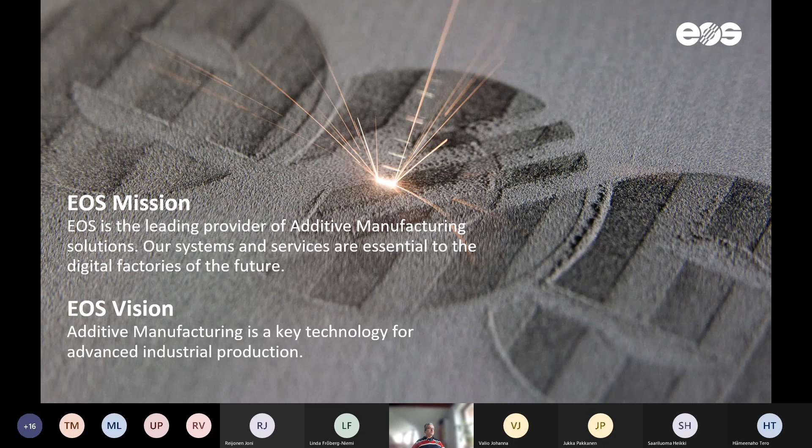So that's a little bit the figures. One way of describing the importance of a company is to talk about installed base, and that's only one number. It's not a very good number, but it is a number. Throughout its history, EOS has installed close to 4,000 systems around the globe, out of which a little more than half are metal systems and a little less are polymer systems. This shows the trend globally as well, because polymer systems were introduced first, and for most of the history they were always dominating, but then, with the introduction of industrial or high-level materials which could be used in demanding applications, this made a turn in the distribution of systems.

So nowadays metals are dominating the action a little bit.

Sales numbers, we experienced a relatively tough situation a year ago, with an impact coming from slight stagnation in the additive manufacturing industry, plus of course the pandemic which hit us. We lost a lot, basically a third of the sales last year. So, of course, this means the company has been under restructuring, and to some extent still is, but now it looks already much better, and the signs are promising, so we will survive.

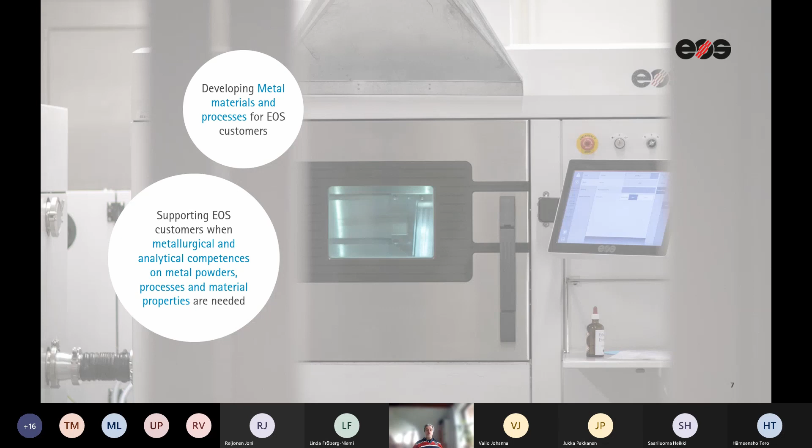So the history, why do we exist? Why does a Bavarian family-owned company have a subsidiary in Turku, Finland? There are historical reasons for that: we started jointly with EOS to develop the metal application for additive manufacturing, which was at that time called rapid prototyping. All the metal materials know-how that EOS has basically comes from this organization.

In the 90s, we kept on developing the technology jointly, but then in 2000, because the original owner, which was Swedish Electrolux, decided that this was definitely not their core business, they decided to sell the factory where the development was happening. Before the sale, EOS wanted to arrange different conditions for the developers, and they founded a company in Finland where all the developers moved to. That's when we became part of EOS.

So we have worked the whole history around the technology, first as a joint project or collaboration partner, and then from 2000 on as part of the EOS organization. We are now about 65 people, a little less than half within the R&D organization, which was the original function. But now we also have sourcing and many other parts, like it has all the parts of a normal company, except sales—we utilize the corporation's sales channels.

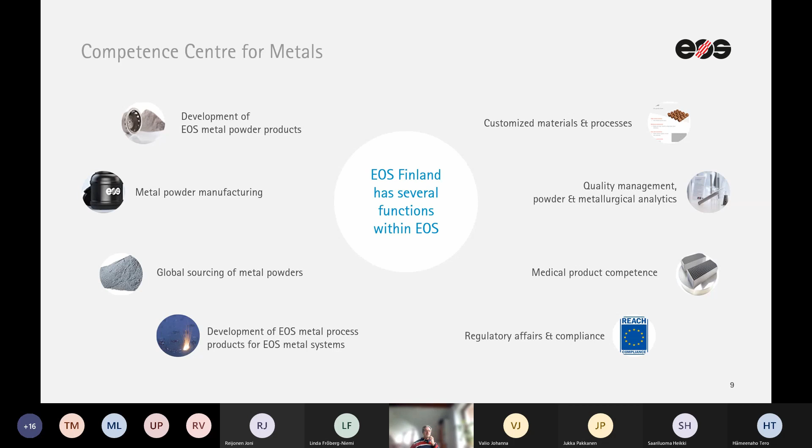We have a lot of machines, obviously, for internal use. We have big machines, medium-sized machines, and small machines, and they're all used for different purposes, but mostly to develop new processes and new powder materials, and also for quality control of our powder products, because we make sure that our original promise of part performance happens throughout the history of each powder product.

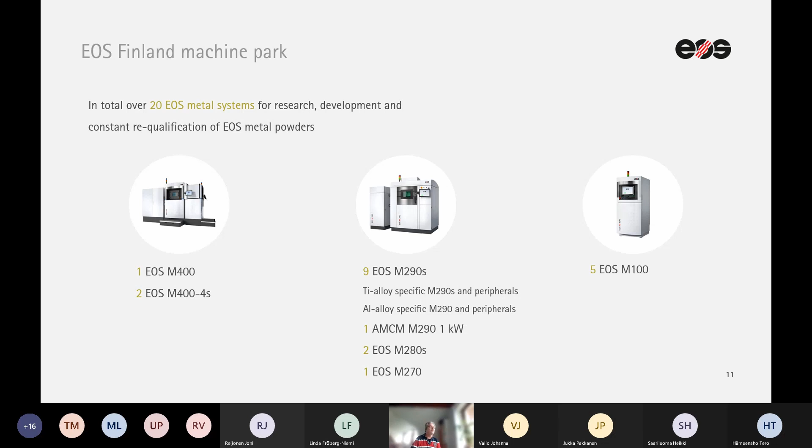AM of metals is not only the printer and powder put in, it is very much nowadays about monitoring of the process, what happens there, and in the future this will probably lead into closed loop control of the machines. But we want to create data which confirms to the customers that everything in my job was okay, that they can rely on my parts, and they don't necessarily have to produce test parts for destructive testing per each job. They can also rely on digital data to make sure that the other parts are okay.

AM of metal is very much about heat treatments, as metals usually is. So we are equipped with a very good setup also in heat treatment facilities. The reason we had to also have know-how in this is that AM is a new way of synthesizing materials, and conventional methods around the globe are based on completely different principles. This automatically leads to the fact that the heat treatments which are built into the metal properties have to also be adapted for the AM world. So we have to develop new furnace processes, new heat treatments for even conventional alloys when they are brought into the AM world.

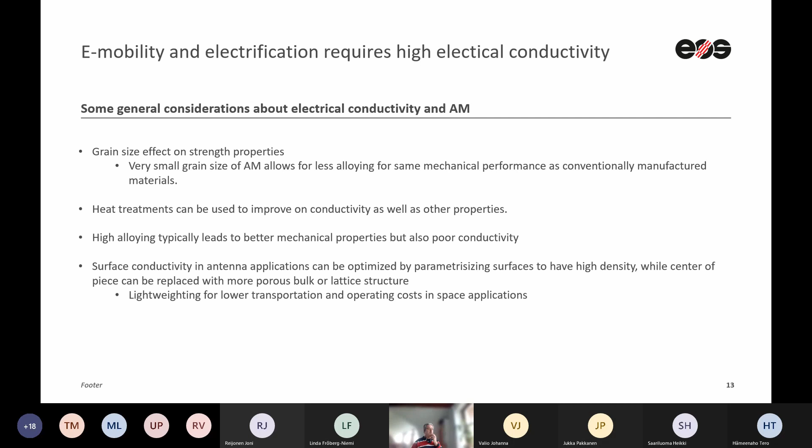Also space applications, of course, where weight is poison, this can help optimize parts for that purpose as well.

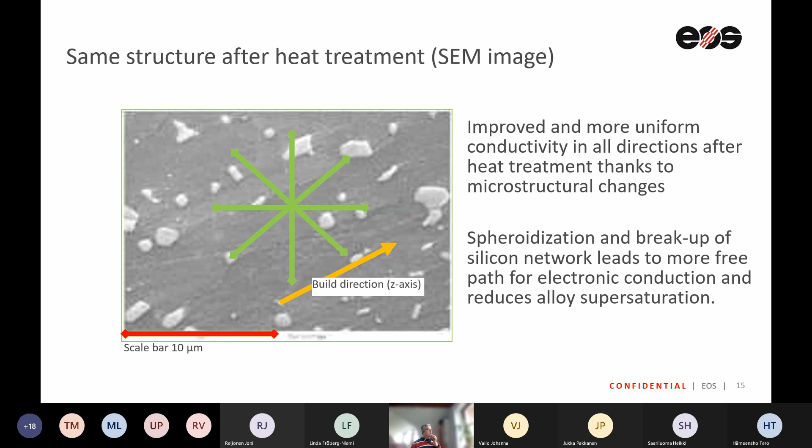Copper is a relatively hot topic at the moment because of certain interest raised from different areas of the industry, which has led into interest of pure copper, but also copper alloys. At the same time, it has led us to make sure we are talking about the right numbers, even in the case of conductivity.

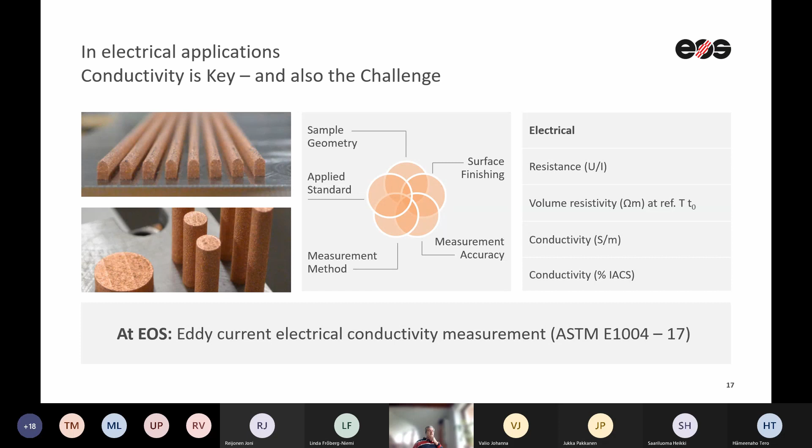So we standardized our way of measuring all these things and try to apply this also with all our partners to make sure we talk about the same thing. There's a lot of things which influence the measurement of conductivity: geometry, surface finish, and also typical accuracy considerations and measurement method. Therefore, it can be a really confusing world because people claim certain things which are not really comparable.

So the challenges. There's a lot of challenges when processing copper in the AM machines. One is that because of the high conductivity, heat can build up in specific areas and escape completely in other areas, which can lead to very difficult or sometimes even impossible control of the process. You can see there's a copper platform with some test parts on top, some of which have peeled off completely, although the same process parameters were applied to all these parts, simply because of the differences in conditions on different parts of the build platform. That's a development challenge, to make this work uniformly in all machines and all situations, having all different kinds of parts on the platform.

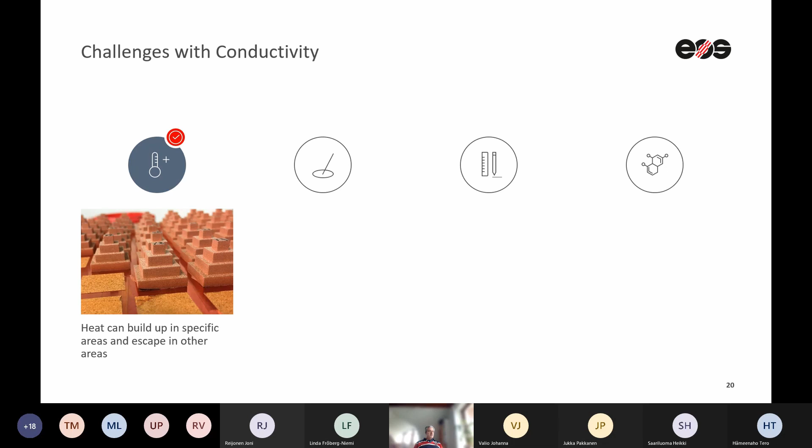Also, the melt pool size of copper processing is an issue. Although you have the so-called nominal laser spot size, which might be 80 micrometers, in some cases when you draw a line, the line width will be multiples of this nominal thickness simply because of high conductivity. Also, copper being a relatively soft material, you have to design the jobs in a way that no distortions happen because of the inevitable forces in the build process. That's also a challenge.

Also, the oxygen pickup of copper, which usually is only on the surfaces, the powder particle surfaces, can be significant, but usually not very, very dangerous.

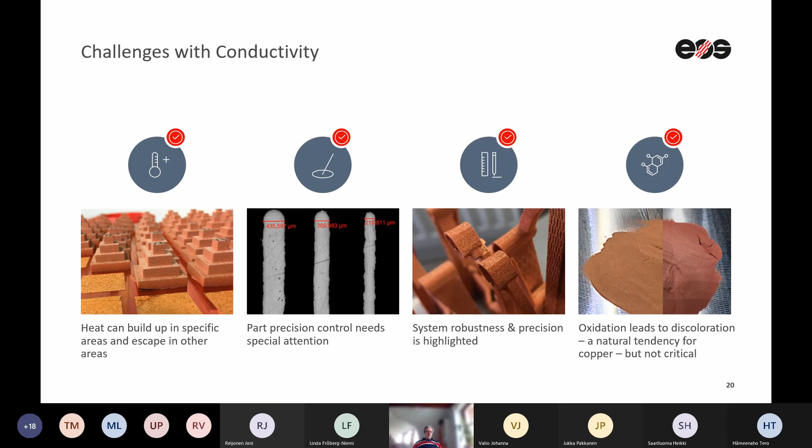So that's why in our terminology, because we introduced already some years ago the TRL scales, where we try to describe the maturity of different products. Our copper products are at the moment TRL 3, which is kind of concept proof level. Usually it's very difficult for manufacturing companies to take this kind of materials into use simply because of the uncertainties here and there. But we are moving on, also, of course, in our work.

So we have worked with three different copper alloys at the moment. So pure copper, and you can see some application examples. The productivity of pure copper in the machines is relatively low because of the problems just described earlier. Mechanical properties, of course, of pure copper are moderate.

And then, of course, there are alloys, where people, by alloying, are trying to make compromises between the heat conductivity or electrical conductivity against mechanical properties. Here we see a launcher example, a space example of copper alloy, where the conductivity is slightly less than in pure copper, but productivity, because again of the less conductivity, you can increase productivity in the machines. Also mechanical properties are slightly better, not hugely better, but slightly better. And then further alloying on the right side leads into even more reduction in conductivity, also in this case productivity, but mechanical properties are then already much better than the previous two examples show.

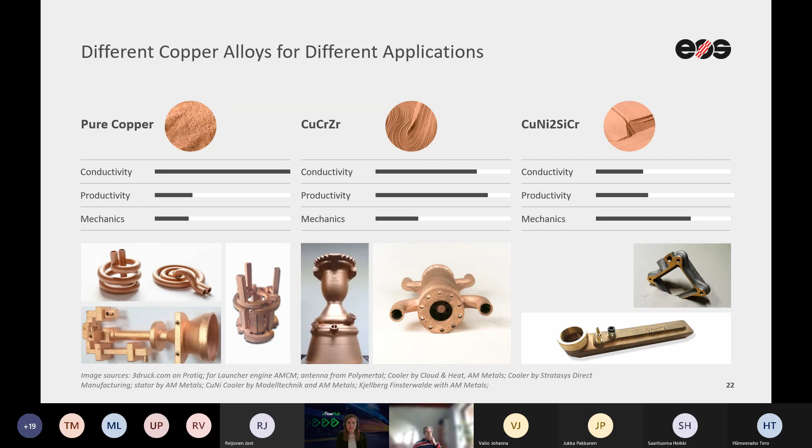So commercial use is not very widely spread at the moment, but it's all kinds of coolers, heat exchangers, some electric motor applications, some nozzles which need copper properties, and also radio frequency communication, where you are trying to make everything smaller and of course improve the efficiency.

Contacts, where you can combine one of the biggest advantages of AM, which is internal kind of free-form cooling channels. So you can drive high currents through contacts because you can cool them at the same time very efficiently. And also all kinds of inductors, because of the added freedom of design in these things. Also, this is picking up.

It's just an example of additive drives, a traction motor part, which is of course a very difficult part to manufacture, but the combination of fast prototyping to serial manufacturing or small series manufacturing of these parts is a very efficient way of introducing the traditional prototyping approach also to electrical motors.

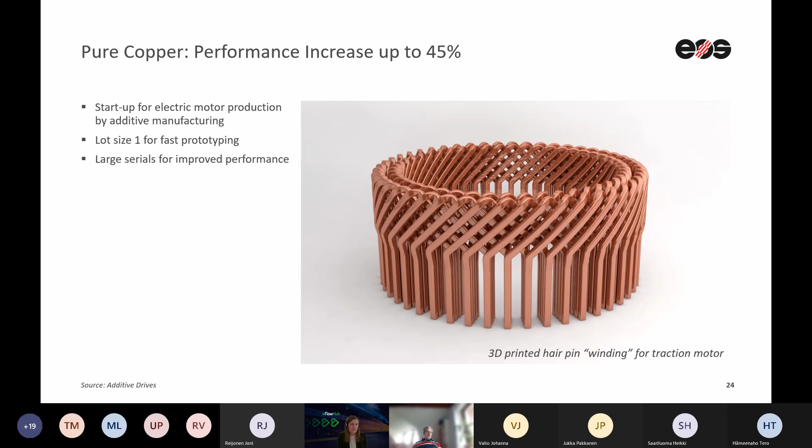That's the launcher application. It was done in a special machine made by AMCM, which is a sister company of EOS. They typically modify EOS machines to be adapted for a certain application. In this case, one M400 single-field machine was converted to be able to handle a 1-meter-tall part.

So this part is close to 1 meter tall, and our job in this case was to develop the process, copper chromium zirconium process, using this machine, and also enabling this part to be built in series as the customer needs.

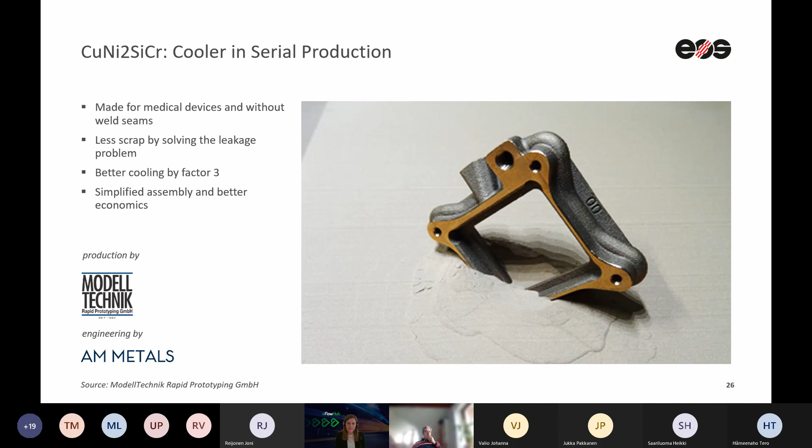And also a little bit about the future, because we have just opened the field towards electrical conductivity and also heat conduction, and we think this will be a big thing in the future. So we also want to move on by introducing high purity aluminum. You can see the properties there, and then, because not all applications can handle the kind of mechanical requirements, some applications, typically satellite applications, are such that the high conductivity material's mechanical properties are not enough.

So we want to introduce also a low alloyed version of aluminum, a proprietary aluminum, which would withstand a little bit more force, but still maintain a reasonable IACS value for conduction purposes, in this case electrical conduction purposes. So waveguides, thermal management of components, electronics casing, etc. We will see what happens.

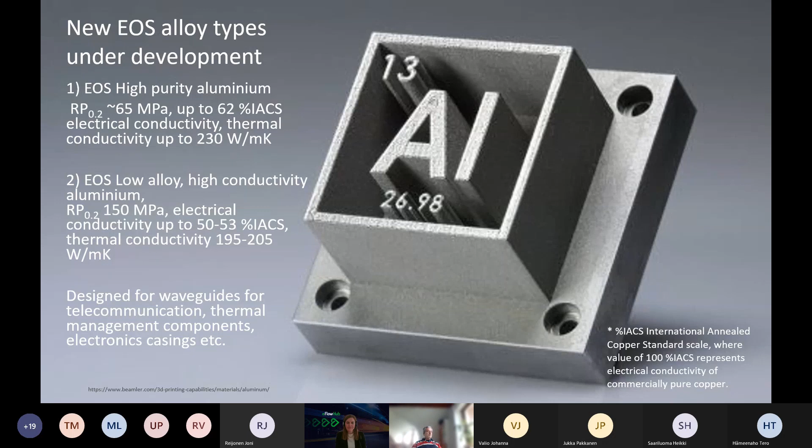Okay, that was my introduction to our understanding of what AM and electrification might be. We will hear about additive manufacturing in the automotive industry, about the past, the present, and future possibilities and challenges. The presentation will be given by Jukka Pakkanen, the development manager of additive manufacturing at Salon MetalElektro. Please go ahead, Jukka.

Thank you very much. My plan for this webinar is to give you some kind of review about additive manufacturing and the automotive industry, because not all of us are really deeply connected to AM, what happens every year and so on. I have been working with additive manufacturing directly since 2014, and here's my short review for the past decade and the history of additive manufacturing from the point of view of the automotive industry.

So first of all, I want to introduce Salon MetalElektro, which is part of the Salon SME Electro Group, consisting of two companies: Salon MetalElektro, a mechanical subcontracting company, and Sorva Electro, doing electronics subcontracting. This company is also family-owned, fully Finnish, and we have been in different businesses for 50 years this year.

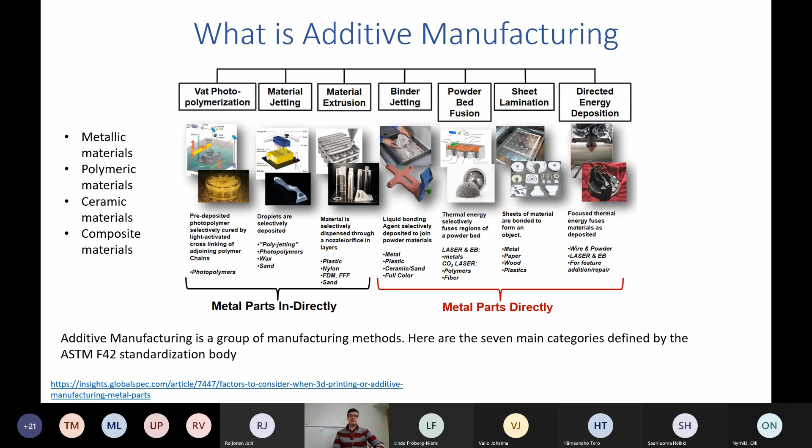Within this manufacturing family, you might be able to find a solution that can give you good parts instead of casting or instead of metal injection molding. You might find it within the additive manufacturing families, from the different family trees.

So going for the short history of additive manufacturing, currently it is over 5 decades of additive manufacturing. In my personal opinion, I start from the 1980s, and I say that it's the founding decade, when the computational computers came. You would be able to have the first vat photopolymerization machinery, and you could find the first pioneers going.

The 1990s, I would say it's the decade of exploration. You will finally find the first CAD models, you could make the computational design, then you have the computer and try to find a way to make the 3D printing additive manufacturing. A nice thing the previous presentation by Olli Nyrhilä said, is that they have been here in Finland since the early starts with metals and sometimes polymers. And here in Varsinais-Suomi, we have good historical expertise through them and other companies like Ajatec.

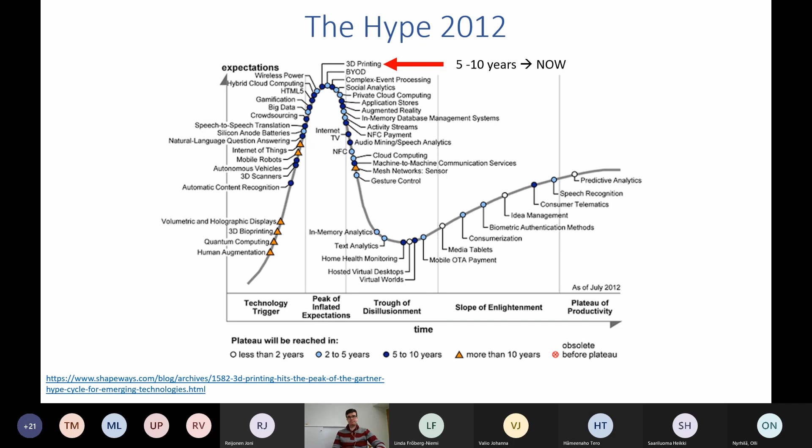So where did we see the value in the early decade? The workhorse of additive manufacturing had been prototyping, because prototypes are expensive to make, it's labor intensive, and you need experienced personnel. So we saw that the business value was in prototyping, then going to spare part production, digital warehouse, and these special parts. I kind of see that it's going towards that way.

But let's go for the last forecasts. This is from last year, and it says that starting from 2020, where the automotive industry could utilize additive manufacturing, we are seeing that they are expecting to have like 5 times the growth from the 2020 level within 10 years.

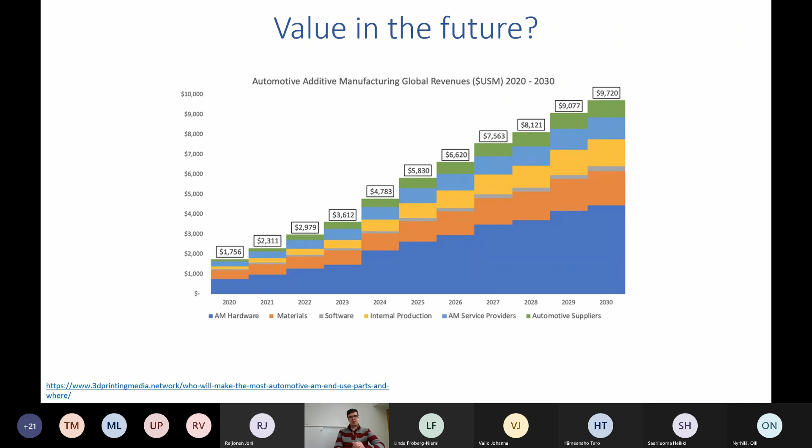Where we see the value coming is in the parts manufacturers and the AM service providers. We can see that big companies like BMW, Daimler, Volkswagen, Oerlikon and others have been purchasing and putting a lot of money into the machinery itself. Then you see the production and even usage of additive manufacturing parts in automotive, in complex assemblies.

Why has additive manufacturing been growing for the automotive industry and other industries? For rapid prototyping, just general benefits like harnessing the impossible. Impossible because with casting you can do one thing, with machining you can do another thing, with additive manufacturing you can do a little bit of everything, but different, yet similar enough that you can use the final product. So in bullet points, with additive manufacturing it's possible to save time from idea to object. You have the CAD model that somebody imagined, drawn. You get it printed, you get it in the hand. You can make fast adaptations. There is no need of a skilled artisan to make it. You can save material, for example, in the life cycle cost.

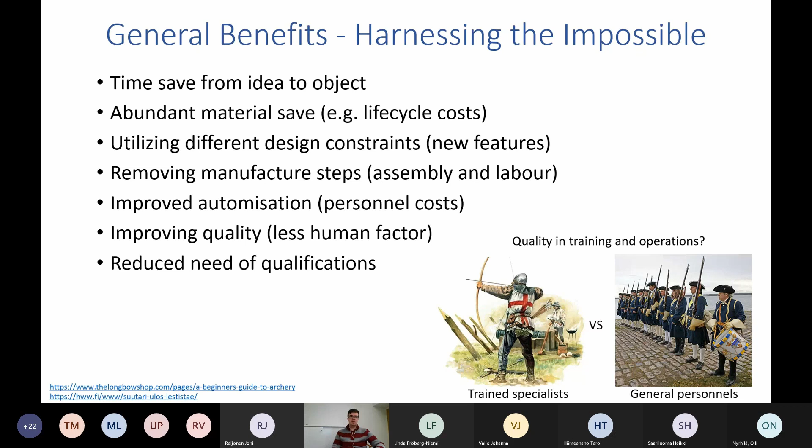I could imagine this is the same kind of leap in quality and training and operations as in warfare, where you had highly skilled marksmen and then you went into the militia as general personnel. Take a specialist out, put in general personnel - automation, saving costs and time.

This is how I imagine the automotive industry possibilities. Automotive industry is so huge, there are a lot of possibilities. You have really one-off models, high-end. Then on the opposite scale, you have tooling, parts, and mass production. So one-off models - prototypes that people are making, customization, motor sports for safety development, high-end models, low-run models, luxury. In my opinion, in the top end, additive manufacturing has been able to penetrate there. In the lower end, for high production models, mass products, additive manufacturing cost-wise is not there yet, but eventually it will be pushed there by the sheer mass of the market.

And another area where additive manufacturing is used is in tooling and parts. You need a small jig made fast - make a CAD out of it, print it, use it, most likely it works.

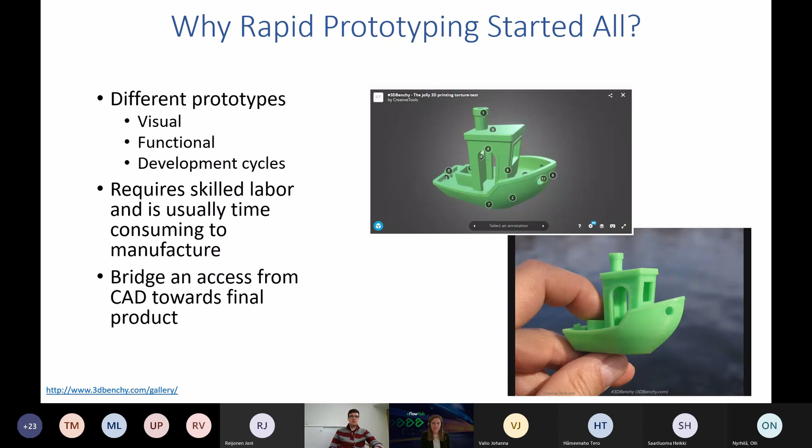Let's go through the different kinds of prototypes. In automotive modeling, you have skilled artisans making visual product modeling. You have clay models that are good for the car's small shape, also the big shape cars. You have a dolly at the bottom, then you have the frame, and you have a clay, one-size full car there that is modeled all the time. With additive manufacturing, maybe they can make a few steps less and cheaper.

Then on the other hand, you have the older style, but I personally like wood modeling. Like the Fiat 500 was modeled fully by wood, and one by one, it is a beautiful piece of art.

When you go for the components, before everything, you need to have a working prototype. You can have a one-off component that you make, test, and finally finalize into the assembly line.

In the old time, when Ford Motor Company wanted a successor for the Model T, they did a lot of research to make a flathead V8 engine fully castable, and that drained so much effort from the company that they almost went bust. But luckily they were able to make the cast block of the engine, and that created huge success for the next decades. So this is where additive manufacturing might help.

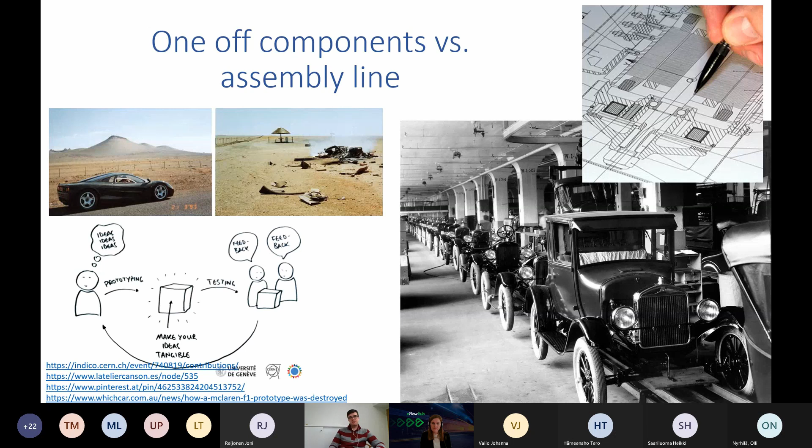So additive manufacturing can make these cycles faster. When you have all of the data, you know how to reproduce the parts, even if it's expensive, but you can reproduce it.

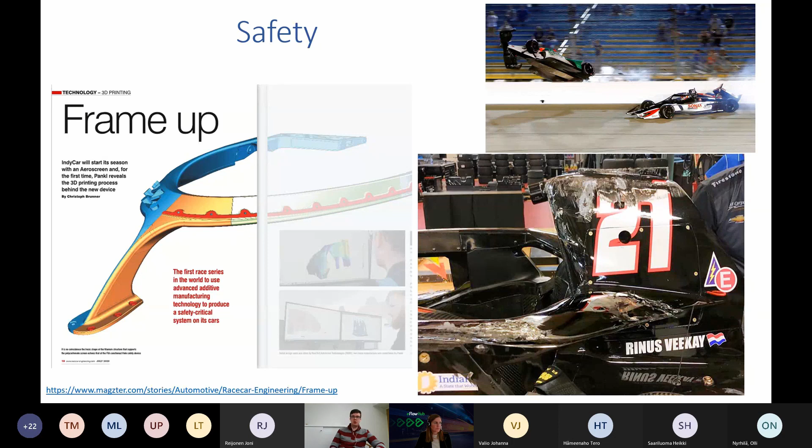Going forward, you have other conditions like safety for motorsports. You can create shapes that might not otherwise be possible, but that save lives. Here's a frame that is in IndyCars, and it saves lives when you have a roll hoop around your helmet during a huge crash.

Going further for the industry cases, like I said, high-end automotive parts are currently leading the field. You have brake parts, and parts going for limited models, 500 cars or less for the whole process - million euro cars and hypercars. This is the current state of the art, that additive manufacturing is able to produce parts for that.

Hopefully in the future it will be able to push itself towards production cars. But just like, for example, Mini this year announced they had some 3D printed decals that you could buy for your Mini - they discontinued this. The market might not be there, but still it needs to be explored.

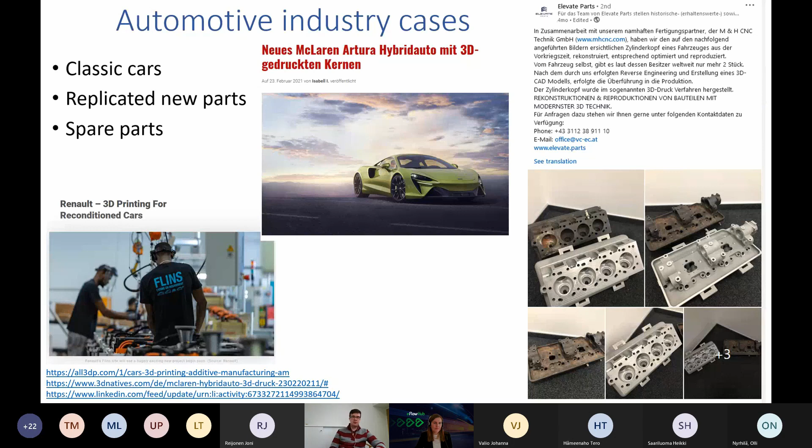Other thing is to recreate classic cars with old parts. Renault has said they are doing it. New cars are made, and then you can, for example, reproduce old parts with modern technologies, and be able to have a modern customized reproduction part, just like on the right for the cylinder head.

In other cases, tooling manufacture - just like Volkswagen has been quite a lot in the news, saying they are using within the industry manufacturing tools made with 3D printed plastics, saving money through there. Their head has said they're using additive manufacturing in high-end cars currently, but maybe it will come into normal production cars a little bit later.

On the left, you will be able to read the links showing what different manufacturers are using additive manufacturing for. Those are interesting to read, from last year from 3D Printing Media. You should definitely, if you have interest, go further into these cases when you get the slides.

In the automotive industry, standardization efforts are moving forward with ISO and ASTM towards automotive manufacturing and additive manufacturing. So this is coming - it might not be in 1 or 2 years, but within 5 years there will definitely be standardization for how to make something.

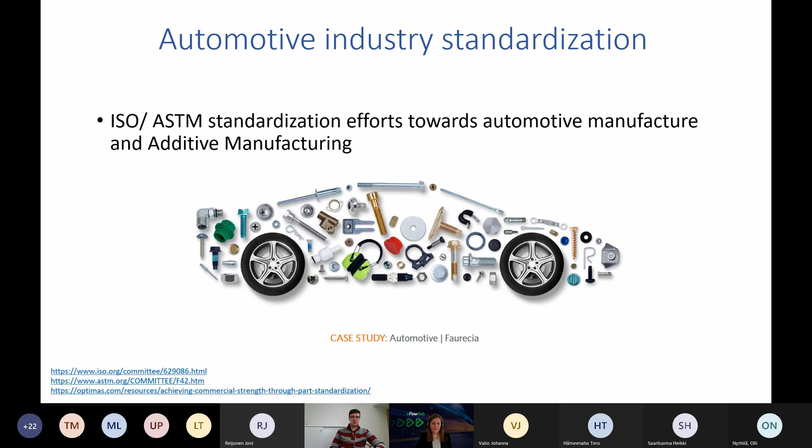What about the future? Thinking about electricity, e-mobility and everything, I see this future in batteries. You have a conventional design that's an assembly. In my opinion, additive manufacturing can be used so that when everything is made well, we could create everything in the battery in the same step instead of assemblies, saving time, money, space, and maybe we can use special materials that create something nice. I think here is the hype - making from existing materials in one step something smaller.

And what about the factory of the future? Will it be conventional machining, will it be additive manufacturing, will it be a hybrid - what will we have?

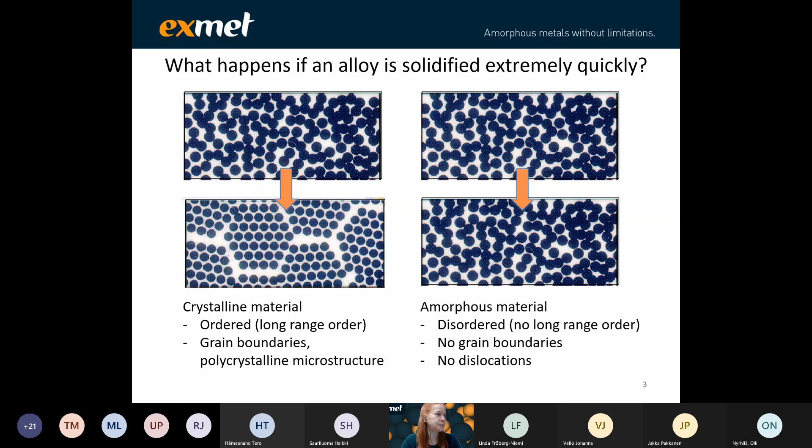What happens then? I talked about there being no grains and grain boundaries anymore in this frozen liquid. The material ends up with a mixture of properties that is rather unique. Looking at the mechanical properties, because it's easy to understand, we have a combination of high strength and high elasticity - high strength as of a metal, but elasticity more comparable to polymers, many polymers.

In this webinar, I believe the ferromagnetic properties are the most interesting ones, so they are highlighted on this page. If we have a ferromagnetic amorphous alloy, compared to the crystalline equivalent, we get a lower hysteresis, lower coercivity compared to the crystalline equivalent. We have a high permeability, moderate saturation, good high frequency behavior, high resistivity, and also high mechanical strength.

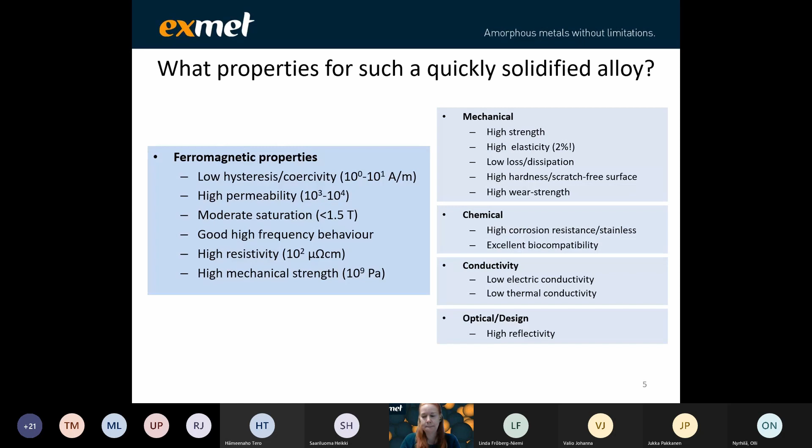What does that mean if we were to use these amorphous metal components in, for instance, mechanical structures? These better mechanical properties would often, if we design for it, lead to using less material, and therefore we save weight. We have lighter parts. In electrical motors and other such applications, we can increase efficiency due to the soft magnetic properties that are excellent compared to some crystalline equivalents.

This is where we come in from Exmet's side. I will not present the rest of my presentation as a specialist on these applications - it's our customers that know their applications. We offer material processes facilitating this. Amorphous metals have been known since the 1960s, but achieving these very high, quick cooling rates has proved to be quite difficult.

Using conventional techniques such as sputtering, thin films, and melt spinning, which results in ribbons, or thermal spray to produce surface coatings, the largest cross sections produced are measured in micrometers or possibly millimeters. So even though these materials have interesting physical properties that can be useful in applications, their application has been limited due to these dimensional requirements.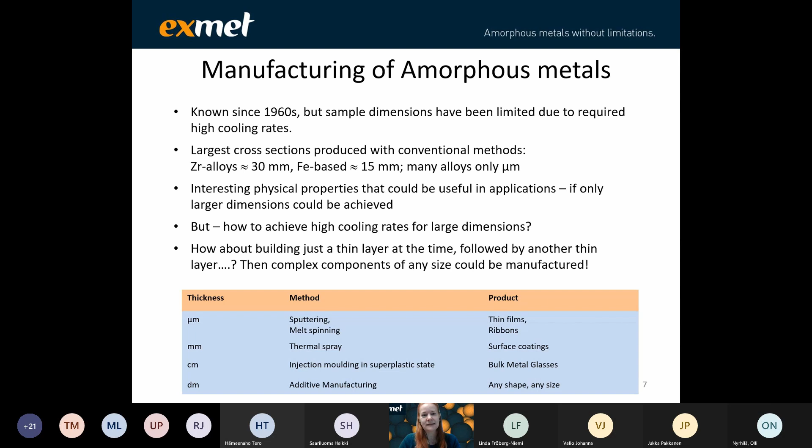As it happens, these very high solidification rates are inherently present in laser and EBM-based metal AM processes. So it appears to be a perfect match to use alloys intended for fast cooling in AM processes. It's a win-win: these components cannot be created with conventional methods, and likewise it's a good fit for processes with high cooling rates.

That's what Exmet has been doing for some years now. Our first generation materials started with a slightly simpler, well-known alloy group of zirconium-based alloys, which is a well-known family in the amorphous world. I show it today to say that this is where we proved we got the first feasibility results from this alloy group, even though it's not very interesting for the webinar today.

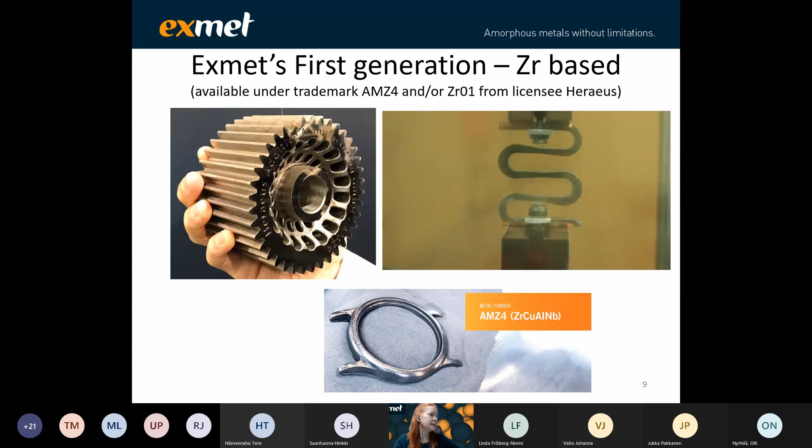This is our more mature material, now commercially available through Heraeus, our licensee. Our second generation materials are iron-based, which is more demanding for us to process, but also even more difficult to process using conventional amorphous manufacturing methods.

With these parts that we've built in our lab in Stockholm, we can build centimeters. The largest part here, built until I ran out of powder literally, is 60 millimeters in diameter and some 50 millimeters tall. These are alloys that previously could only be processed to a few millimeters in size.

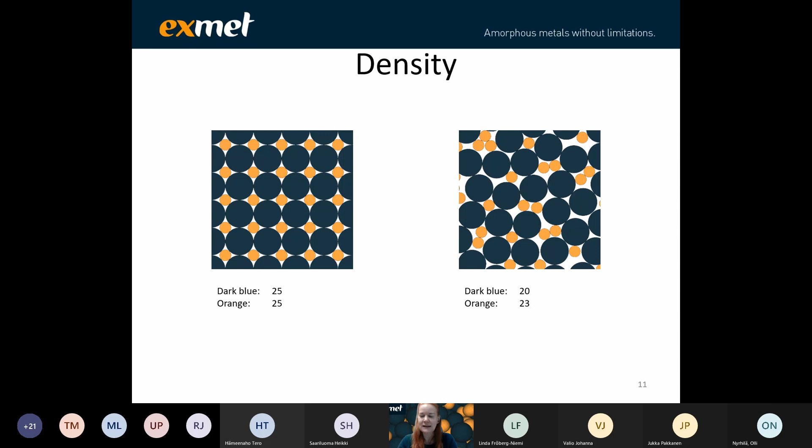So what properties do these materials get? If we look in detail and try to understand the atomic world, the crystalline material to the left has a higher density than ours. Normal steel has density around 7.8, while our amorphous iron-based alloys have densities of about 7.4 to 7.6, which can be explained by this less ordered packing of atoms. It's not as well structured, more random, and not as many big and small atoms, the dark blue and orange circles, can be fit in a certain volume.

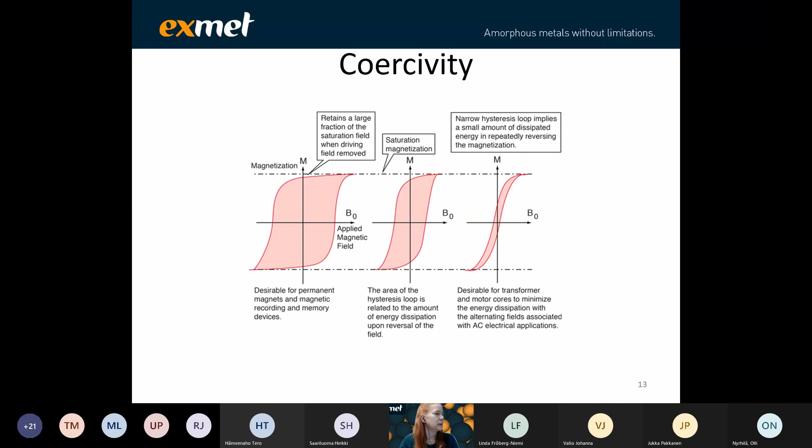Here is the coercivity. Typical for amorphous metals is that we have a more narrow loop in this M versus B field graph. I won't talk more about that, but anyone interested in magnetics will understand this better than me.

Resistivity: here we have an interesting situation when building large cross sections as we do in AM. Normally, stacking and laminating electrical steel sheets lets us manage eddy current losses through lamination, which limits these losses. This is a challenge when we build everything as a bulk, as in AM, since we cannot laminate our particles in this manufacturing process. So we have a bulk instead, and the eddy current behavior is different.

I'll try to summarize the pros of using AM for manufacturing soft magnetic amorphous alloys: we have the material properties already discussed, and the opportunity of building more complex and larger parts. We also have design opportunities with AM, which a clever designer can use to solve the problem of eddy current losses in bulk material.

This graph shows eddy current loss on the vertical axis. The first picture, a bulk design among six designs shown to the right, points to the blue curve in eddy current loss—that's what happens if you measure the bulk. But by using various geometries to break up this bulk, while still building useful, buildable structures with AM, you can by design change the eddy current loss, lowering it to what the second arrow points at the bottom of the graph.

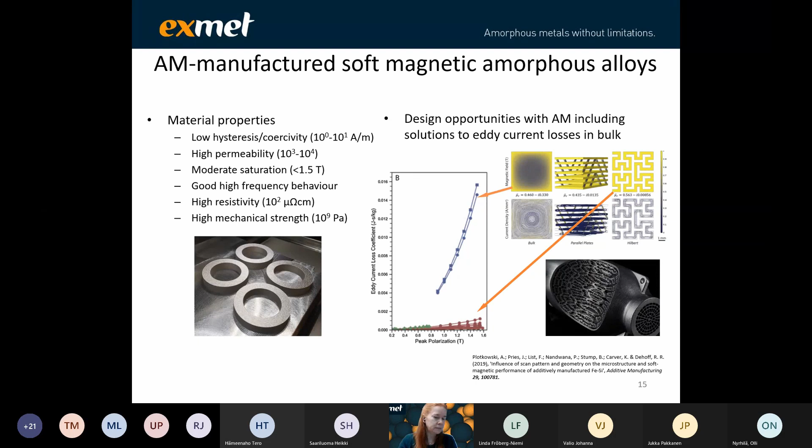When it comes to electric vehicles, it's about identifying those printable components that are good targets for using these methods. Other people than me have disassembled cars and identified parts, and typically it comes down to those components in motors and converters that could be very good objects for soft magnetic components.

So how can we explain to our customers and end users what the value of our technology is? Well, we've done a life cycle cost example for an electric motor part. It's not really the same as for an electric vehicle, since these motors run 24/7 for years in many cases. But just pointing at the general picture, with current technologies that are mature and well spread around the world, material costs are very low, manufacturing is very low - we cannot compete with that, but the in-service losses can be rather substantial.

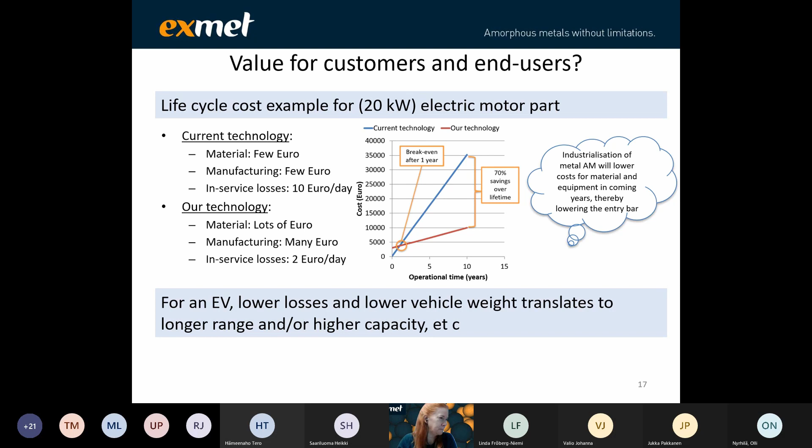So who are we, Exmet AB, in brief? We are a small SME located in Stockholm. We were able to file patent applications, so we have paper that we are the inventor of this proprietary technology, and we can build amorphous metals using additive manufacturing. In that business we offer metal powders, processes, knowledge, alloys, and we are happy to talk to anyone interested in our materials.

So in conclusion, we understand that AM for many conventional materials that has been optimized for slow processes for decades - using AM results in rather unconventional microstructures due to the fast cooling, where we are actually torturing these alloys. Therefore, it's an interesting case to work with alloys that are actually intended and tailored for these fast processes.

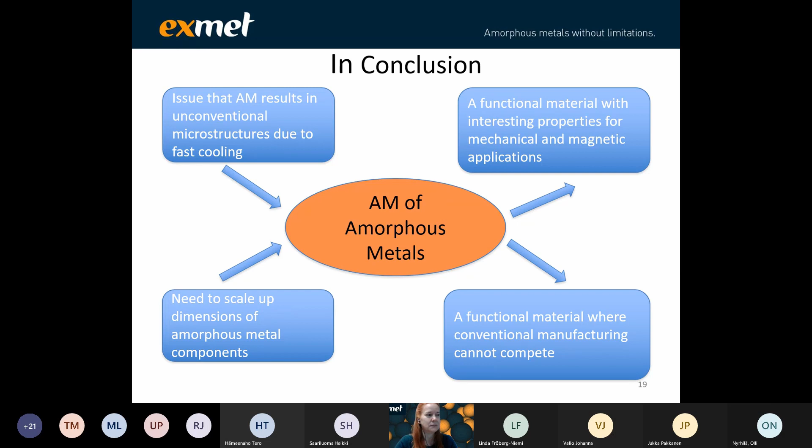We also have the need in the world to scale up the dimensions of amorphous metal components, so we explore the opportunities that lie beyond making micrometer and millimeter size samples. By applying AM on these amorphous metals, we get functional materials with interesting properties for various mechanical and magnetic applications, because we have created a functional material that is very difficult to achieve in conventional manufacturing routes.

So that's what I wanted to present today. Thank you very much.

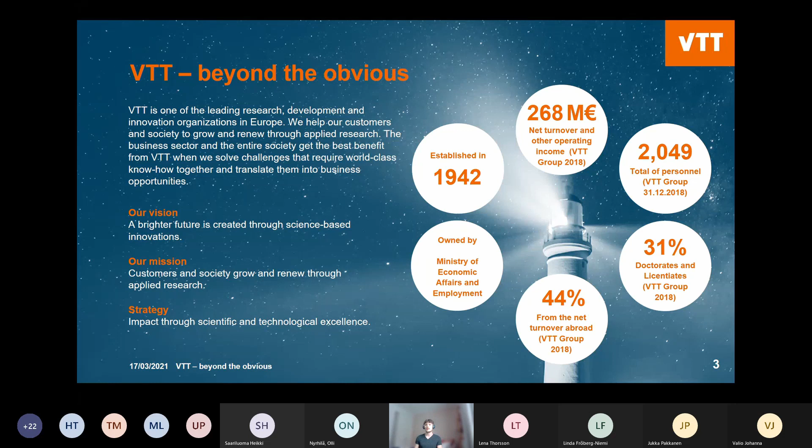Here I have a general slide on topics related to additive manufacturing research that we do at VTT in our group. The basis of our operations is that we have quite extensive experimental facilities, all the way from powder manufacturing, so from gas atomization or plasma spheroidization in case of AM powders when you need spherical particles. We do have some other powder synthesizing means also, but these are the main ones for AM related topics.

Then to the powder characterization, then the additive manufacturing labs. Here I have the laser powder bed fusion system, but lately we've also installed a binder jetting system, though that will not be the focus of today. And then all the way to the post-processing - as mentioned already today, heat treatments are an integral part of additive manufacturing - and then all the way to material and component testing.

If you think about the fields in which we do research, some are related to applications, new applications, such as Jukka mentioned, the digital spare parts. We had a couple of big projects on that topic in past years. Then on the production side, it could be related to quality topics, and also how to integrate additive manufacturing into the processing facility, since it is just one tool in making components. Many times you need other processes like surface finishing and heat treatments and so forth.

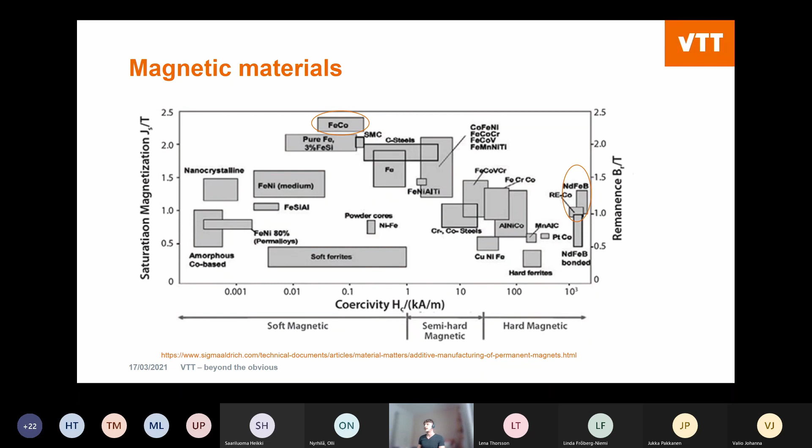A few words about the applications - where magnetic materials are used. Generators, motors, transformers are, let's say, the biggest sectors, especially motors. If you think about permanent magnets, roughly 70% of all permanent magnets are used in all types of motors. This, of course, doesn't mean only motors for e-mobility - this is also industrial motors used in factories and all kinds of places. And then, of course, one big section is consumer electronics, and there especially things related to magnetic recording and voice coils, and applications related to sound amplification.

There was a mention of two projects, one called SOMA, the other 3D Rimac. These are the two projects in which we currently mainly work on these topics - SOMA on the soft magnetic materials, and 3D Rimac on the rare earth based permanent magnet materials and the additive manufacturing of those.

So just as a background, as I've already mentioned and came obvious in the previous presentation, there are many types of magnetic materials, and one of the key properties is the coercivity.

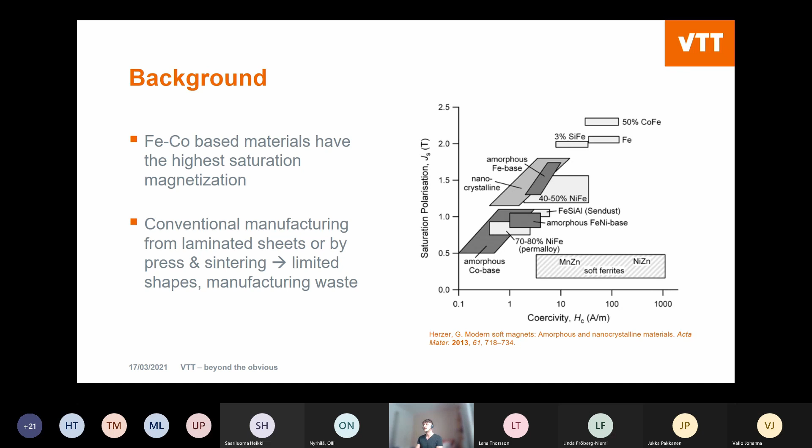Or then the other option is using conventional powder metallurgy ways, in which you are limited in shapes, or at least you need an expensive mold for each shape. So the motivation is the same as using additive manufacturing for any other material typically, which is making complex geometrical shapes in near net shape, meaning you don't have a lot of manufacturing waste like in subtractive manufacturing.

So the first work we did with the iron cobalt, also alloyed with vanadium as a minor alloying element, we were able to reach really comparable properties, mechanical and magnetic, compared to the laminated, so the standard material that you use today.

Here you can see some of the key properties, but the challenge that remained was the eddy current losses, also mentioned earlier in the previous presentation, that this lamination is applied in conventional manufacturing to prevent the eddy current losses. This we don't have in additive manufacturing, which is a challenge we've tried to tackle in this SOMA project also.

But some of the first things we tried, as also was shown in the approach by other research groups, is that we use the geometry of the component, so clever design, to introduce gaps into the material to prevent the progress of the eddy currents.

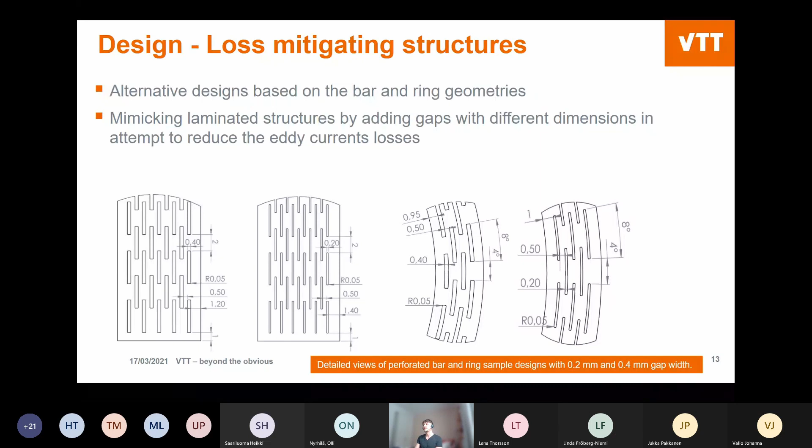So here, first of all, you can see that we were able to reduce the losses from the solid ring samples, but we weren't able to reach quite the level of the laminated structure. Sorry, I seem to have my automatic slide timing going on, but I'll try to manage.

And then on the left-hand side, you can see the coercivity and the remanence. The red one here, so a narrow loop here, would be the ideal - this is the conventional material. Then here on the... sorry, I will do it like this.

Here in blue, you can see the printed material without the holes, so the solid printed material - not what we want. Then with the holes, we were able to reduce the coercivity quite significantly. We had 2 hole sizes, and there wasn't a big difference within this.

The dashed line is the printed material without heat treatment at all, which was bad enough that it doesn't even fit the scale here. The coercivity was really high due to the fact that you have a lot of grain boundaries in the material, as Olli was showing in the first presentation, which is inherent to the laser powder bed fusion process. But with heat treatment, you can improve the properties, and with clever design, you can further improve. But we are still not quite there as with the conventional material.

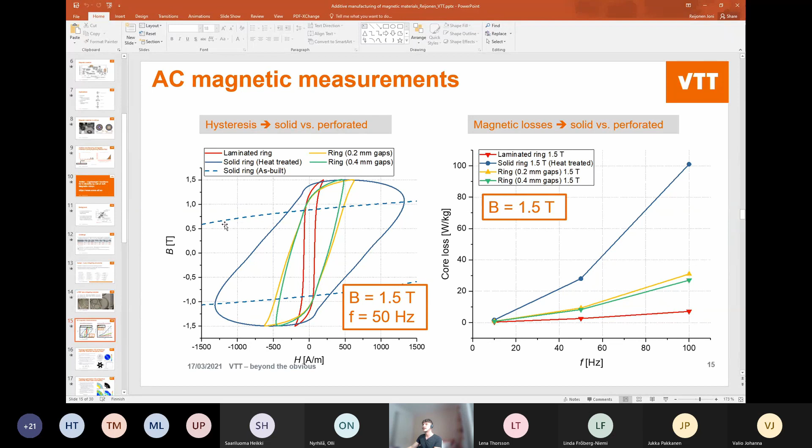This is quite common today already for mechanical applications, where you try to minimize the weight of the component by maximizing the stiffness. But here we've applied the same approach to designing electrical machines, where the objective function was to maximize the torque while minimizing the rotor mass.

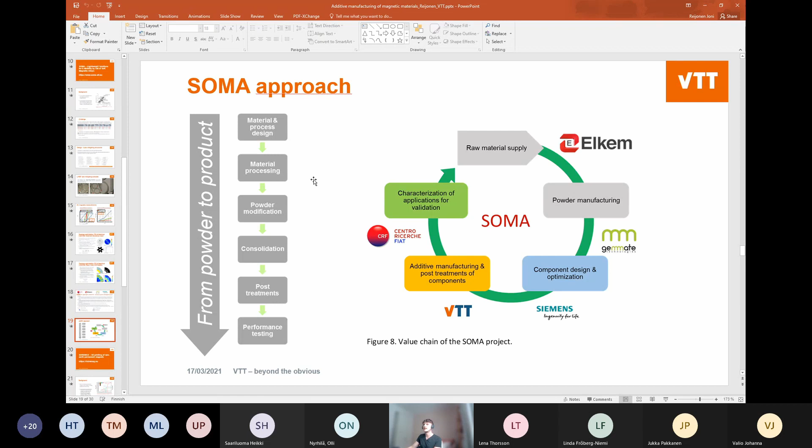Here's the value chain of the processes involved in the project, and also the partners. Our idea is similar to what I showed at the beginning as the core competence of our research at VTT, that we can cover the whole chain from powder manufacturing all the way to testing the performance of the components. We have partners too, we are not doing it alone, but this is the philosophy behind the project.

Then I'll switch to the additive manufacturing of hard magnetic materials, or permanent magnets, the 3DREMAG project. Here we have slightly different properties we are targeting. For a permanent magnet, the main property you want can be summarized as maximum energy product, BH max, which is basically a combination of high coercivity and high remanence magnetization.

Again, the same motivation applies: why do we want to use additive manufacturing for permanent magnets? It's to make complex shapes without waste, and minimizing waste is of key importance, because neodymium, one of the main components, is also typically alloyed with dysprosium and terbium, which are all critical raw materials, with over 90% of the resources controlled by China. These are really strategic materials for the EU, so if we can reduce the waste when we manufacture magnets out of this material, that is of course the target.

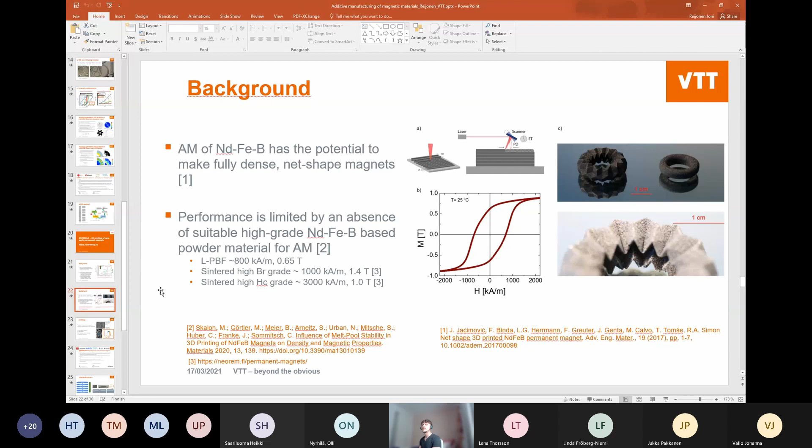The challenge is that to get high properties, you need a specific microstructure. What you want, the best mixture, is where the sintering process is tailored to produce equiaxed grains which are surrounded by a neodymium-rich grain boundary phase. And if you remember from Olli's presentation, the microstructure you get after laser powder bed fusion is totally different, and this is not optimal for this material.

So this is one challenge: how we can create a structure where each of the grains are surrounded by this, so to speak, insulating neodymium-rich grain boundary phase. The other challenge is that there isn't a powder commercially available with the proper powder particle size and shape. We need spherical particles instead of the irregular shape used for conventional sintering of these alloys today, and the same goes for the particle size distribution.

In sintering you use a much smaller particle size, and what we need to do is shift the peak into an area usable for the laser powder bed fusion process, meaning it's easily flowable and you can spread the powder in a homogeneous way so the process works. The purpose of our project is to make such a powder, which is spherical, has the proper particle size distribution for additive manufacturing, and has an alloy composition in which we can reach the desired microstructure and properties in the end.

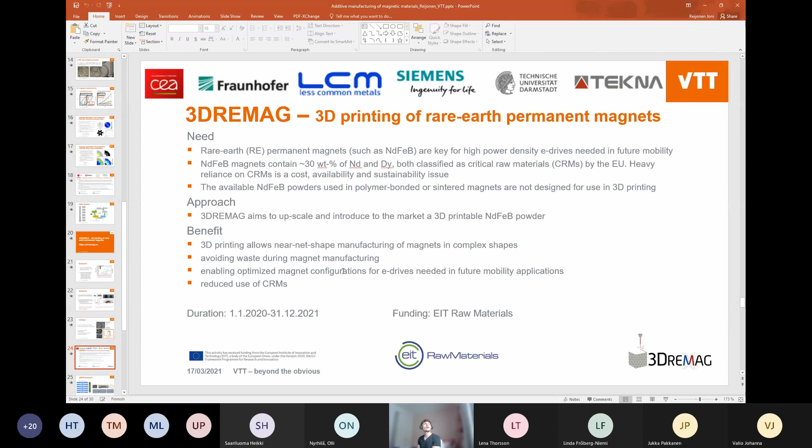The target here is that, as the limiting factor of using additive manufacturing to make neodymium iron boron magnets is that we don't have a suitable raw material, a suitable powder, to do it, the main target in this project is for us, together with our partners, to develop such a powder that works in the process and gives good magnetic properties in the end for the parts.

Here we use the plasma spheroidization. First we use jet milling, then we spheroidize the particles to make them round and suitable for the laser powder bed fusion. Then a heat treatment plays a crucial role in reaching the desired microstructure and hence the desired properties.

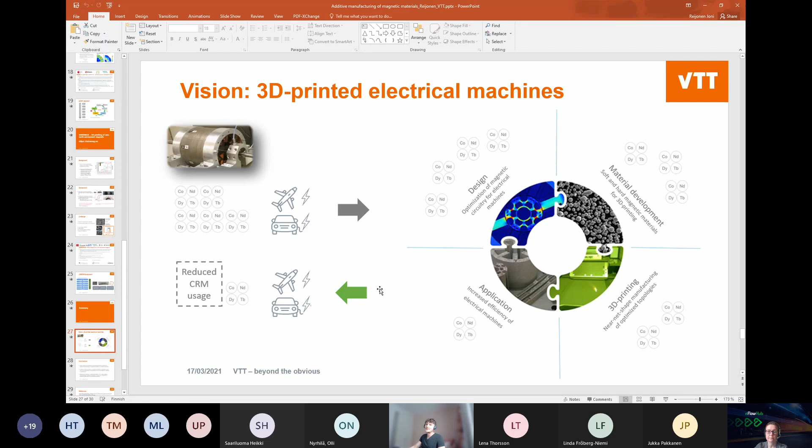So just to conclude quickly, there's a solid foundation for using additive manufacturing in both hard and soft magnetic materials, but it's quite obvious that further research is still needed to meet the properties of the conventional materials we have today. But I'm confident that we can reach, and even in the future exceed, these properties.

To get the best out of this, you need to combine the material, the design, and the manufacturing process. And in each of these steps you have significant potential to reduce the use of critical raw materials in these electrical machines.

From the end, you can find some publications we have on the topic if you are interested in more details. Thanks.

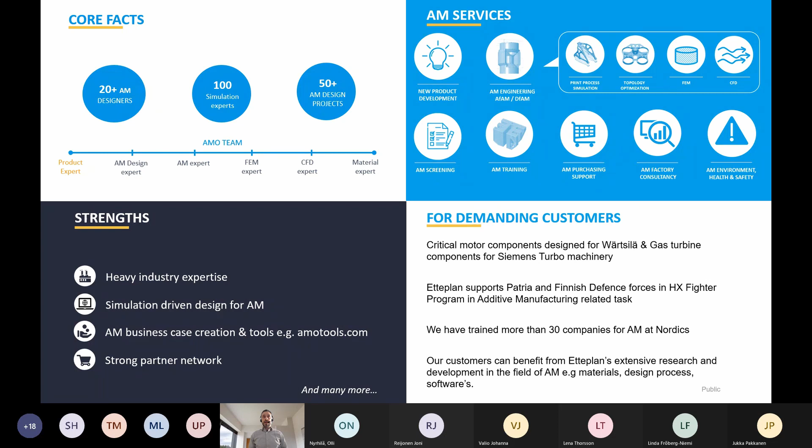Shortly about Etteplan - we are a consultancy company focusing purely on design. From the manufacturing aspect, the services we are offering can be seen here. We are heavily linked in the design of new and current products. We are working on different levels of components, from simple AM components in plastics, to critical components with certain customers. We don't possess any printing capacity of our own, so we work with service providers and research institutions to help our customers really get advantage from additive manufacturing. So what we do is help our customers implement additive manufacturing from idea to market.

Added value comes from design. Today's engineers are facing new challenges: shorter product lead times, increased requirements for carbon footprint and material performances. At the same time, the supply chains are changing, new demands are coming from there.

If we look at the manufacturing processes from the past hundred years, it has been the same. We take a bunch of material and start to remove it with different tools. There are certain limitations for the flexibility when using current tools and methods on the market. More and more, engineers are seeking new technologies for how to make better products for future needs.

Today we have here where additive manufacturing has been started and where it is heading, what kind of material development there is, and I will tell more about how to get the added value out from it.

If you think about additive manufacturing overall, the added value, or why to use additive manufacturing, comes from these: lightweighting components, using special materials to make those lightweighting components, making really complex structures, and part consolidation to get advantage from additive manufacturing.

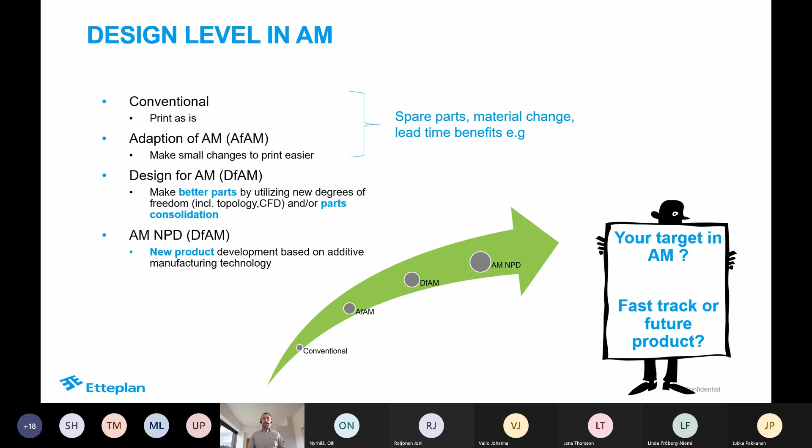This will set the bar for skilled engineers. You need to use new software tools, and you need to have new skill sets to be able to make those complex geometries.

Take, for example, this topology software that we are using to generate the triply periodic minimal surfaces. These are extremely good in different kinds of heat exchanger cases, but almost impossible to do with the current mechanical engineering tools that you have at house. This example is something that will be printed with metal binder jetting, almost 99.9% copper.

So the applications are already there. There are tools to make this design so that engineers' wild plans can be implemented in future products. A few cases from the world.

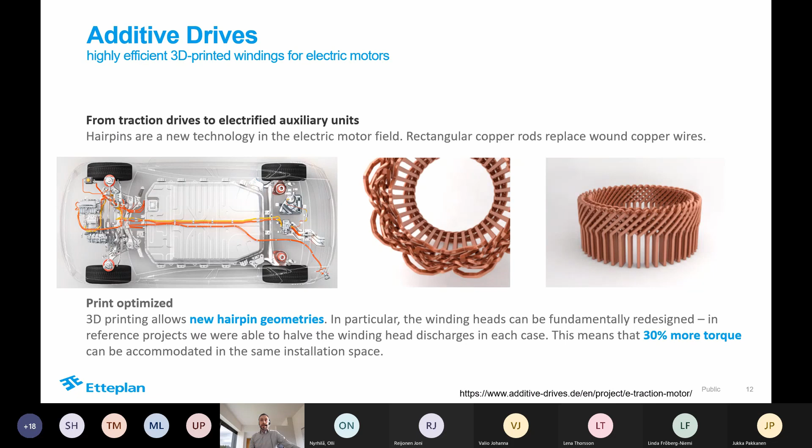This is really interesting, coming from the car sector: design for function, not just to replace the current way of doing things — replacing the rectangular copper rods that are currently used. It's a mindset in engineering to think, okay, I have a new technology, how will I benefit from it the best way, what kind of shapes would be better than the current one. In this case, it's about the torque and the efficiency of the motor that you can achieve while implementing this.

Simulation-driven design comes in, and there are different kinds of simulations: topology optimization, simulating through cost, through shape, through build process, through fluid, through acoustics, or making antenna designs.

That's really vital, and you need to have these skill sets in your team when doing future designs for additive manufacturing — not just replacing current designs with the new technology, but using the benefits it can bring. Do different kinds of concepting that normally minimize the use of material, these near-net-shape products. It's function-driven design, and through design you can minimize post-processing, material usage, and the cost of the product, bringing new functionalities, shorter manufacturing time, with no post-processing needed.

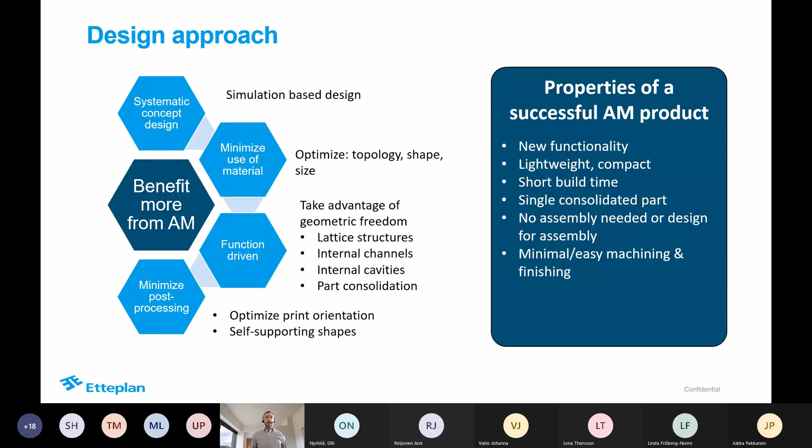Example that we have done for the copper is antenna design, and this has been simulated in our antenna laboratory in Jyväskylä. So 5G antenna made from copper, feasible already today to print these ones. But it's not only about prototyping and testing.

With certain applications and wise engineering, you can really find good business cases already from additive. This example isn't from the car industry, but it's a really good one: a dust Y connector made for Mirka robot sanders. The annual volumes are more than 1,000 pieces, and in the past this part was manufactured in China with a long lead time. We started to work with this one and found that the component was suitable in shape so we could make a nested build, utilizing the whole build chamber volume. That gave significant cost savings when we redesigned the product to be nested, and in the meantime we also achieved better performance and characteristics for these components. So it's more than 50% cheaper than the China-made component nowadays.

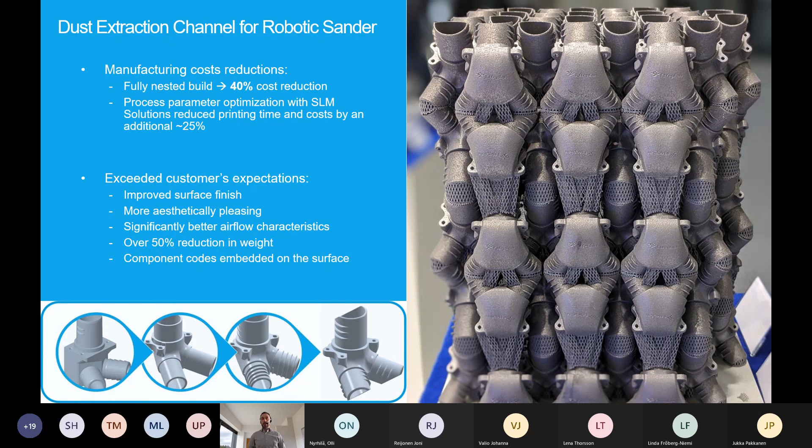But the interesting cases come from the world. Divergent is one company really taking this technology further, revolutionizing car manufacturing and how to think about it. Certain parts from the cars are manufactured by AM and then combined with normally manufactured components - it's hybrid manufacturing. It's really changing the way cars are made, and the same factory can change models really fast. If you think about the investment to build a new car manufacturing production line or factory, we're talking about hundreds of millions. This new digital way of doing things will revolutionize the whole car making industry. For example, PSA, the car company, is really researching this a lot and cooperating with Divergent.

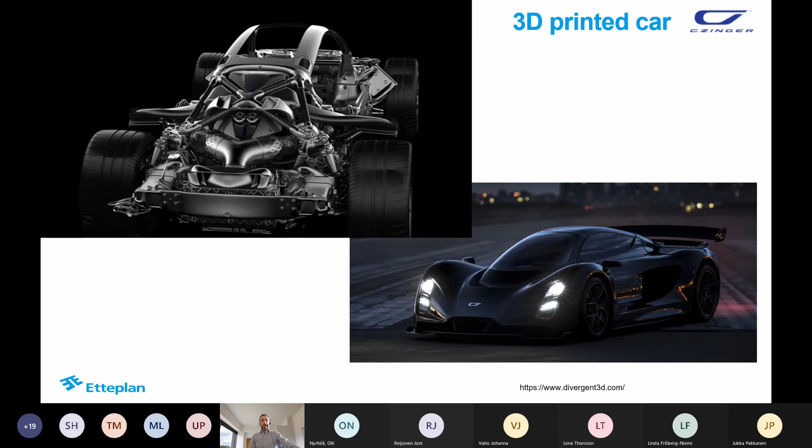And like Jukka said, now the cases come from hypercars, but it's coming from new technology too. For example, BMW is using certain parts in their production where the annual volumes are more than 50,000 pieces, and there additive manufacturing is a feasible manufacturing method cost-wise.

One other case I wanted to show you from the world is Relativity Space. They are making mid-size rockets, and the cool thing about this company is it's now the second largest space company after SpaceX, still developing, getting investments. What these guys are promising: they started thinking from scratch about how the rocket could be made by 3D printing. A similar type of rocket has 100,000 parts, and they are promising to make the rocket with less than 1,000 parts.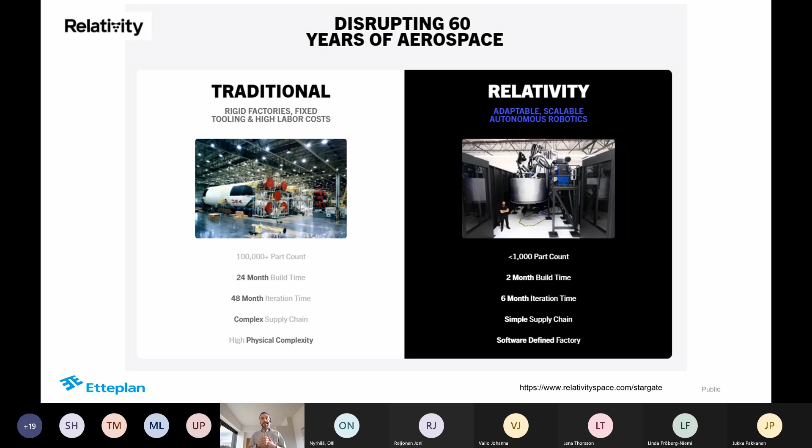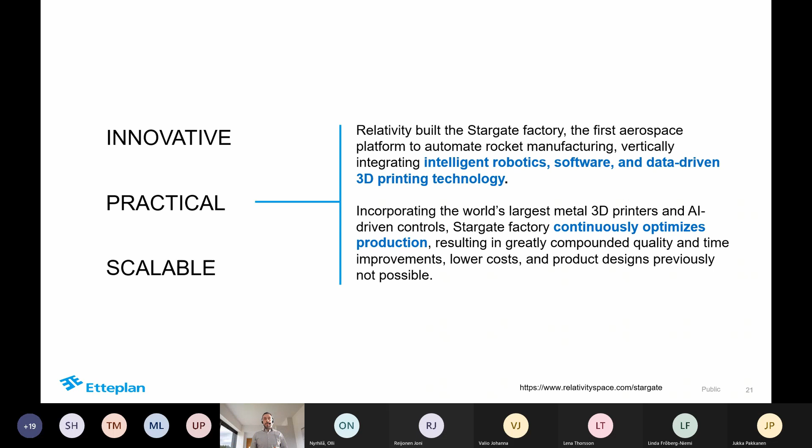A similar type of rocket has a 2-year build time, and these guys are making a rocket in 60 days. 95% of the parts are made by a printer, and they are developing the largest in-house printer so they can print parts of size 10 meters or so. New players are coming to the market who think totally differently about how to make manufacturing innovative, practical, scalable - utilizing intelligent robotics and data-driven manufacturing and 3D printing, enabling continuous optimized production. So within less than 3 or 6 months, they can bring a better rocket to market. They are really skyrocketing now in the field of additive manufacturing and have collected more investments into their company. The company was founded in 2015 and the valuation is $2.3 billion at the moment. So technology-wise, certain companies are going ahead.

So shortly about Finnish Additive Manufacturing Ecosystem, FAME. Why did FAME start? Additive manufacturing as a technology develops so fast. Companies need to fully understand the effect of additive manufacturing, and many companies have worked by themselves in the past, but it hasn't skyrocketed in Finland yet. We are missing big investments, and we don't have big companies in Finland who would really make that level of investment into additive manufacturing that we can see from the world. That's why we need to collaborate and start sharing things. So we decided to start practically and tangibly, using ecosystem resources to build a 3D printing experience pool for the members - first experience something small, then scale it later.

As the technology evolves so fast, it's really hard for people to understand it, or people tend to overestimate the change that will occur in the next 2 years and underestimate the change that will occur in 10. People wiser than me have said this before.

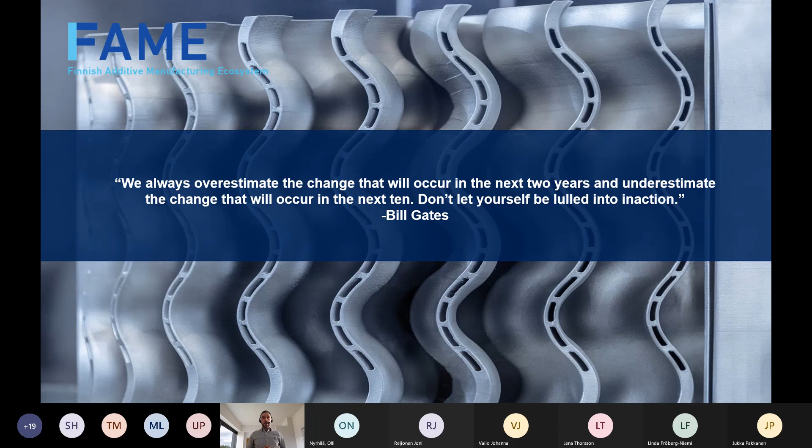What FAME will do is break the silos between the companies, start to make co-innovation and research together, build competencies around that, and share knowledge. So shortly about the activities now in the FAME roadmap in total.

It's a public and private funded R&D program, a co-innovation program, where the target is to create certain kind of material databases and share information from different additive manufacturing technologies so that all the FAME members could speed up their business.

Utilizing the common ground of additive manufacturing knowledge we can generate, through these companies now on board we can have big enough research projects. We can work with research organizations like VTT and universities and guide their research so that Finnish industry can benefit most from additive manufacturing.

Ecosystem operations also include this R&D program preparation, which FAME or DIMECC is doing. We are going to launch certain kinds of trainings, benchmarking tools, events, and communication and promoting.

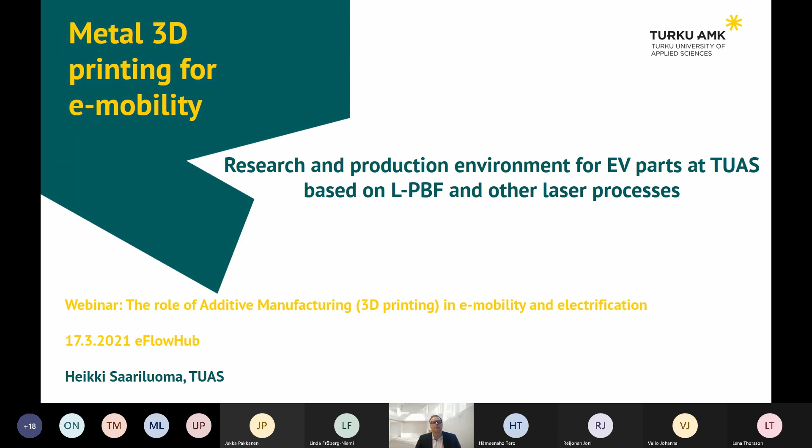Thank you for introducing me. I will speak now more practically about what Turku University of Applied Sciences and the Turku region are doing in this area.

As an educator, our challenge now is to implement this still new technology into our education, but we have good possibilities because we have infrastructure for designing, actual part making, material testing, and also serial production capabilities, so we can actually realize real serial production, or at least zero series production.

We also have partners starting from Turku, working with Valmet, Fraunhofer, Accurate, just to mention some. Turku Machine Technology Center is located in the same facilities, and you will hear more about what we can do together.

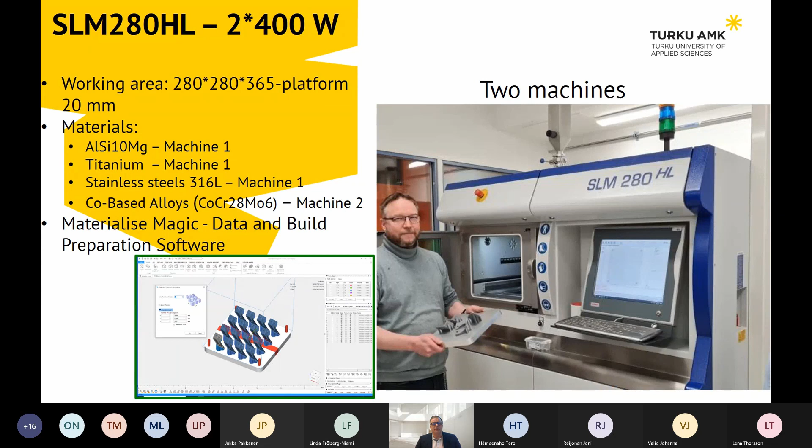As software we are using Materialise Magic for build preparation and so on. The first parts are now made, and once again our aim and challenge is to implement this into our courses and education for new engineers.

We have the Siemens NX environment, and actually all software components are available for us, which we can use for research projects and thesis works for students, and of course in courses for product development and similar areas. So we should have pretty nice tools in this area.

Concerning the EV field, there is also a Simcenter Amesim simulation environment for battery systems, which can also be used for research projects, which actually make up about one third of our budget coming from research and innovation projects. So this is available also.

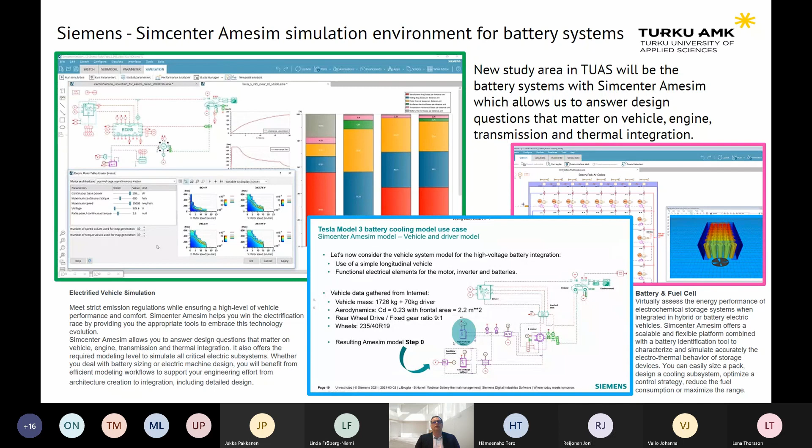There are ready models, for example this Tesla Model 3, so we can think about changing one component and see how it changed the behavior of the model, and this way we can get more information on how the vehicle engine, transmission, or thermal integration is working.

And back to AM, for the topology optimization and lattice structures, we have ANSYS software available, also Siemens Nastran and Frustum solvers.

And for the printing process, we can use ANSYS Additive Suite and Siemens Simcenter 3D Additive Manufacturing module. For example, displacement can be simulated with those programs.

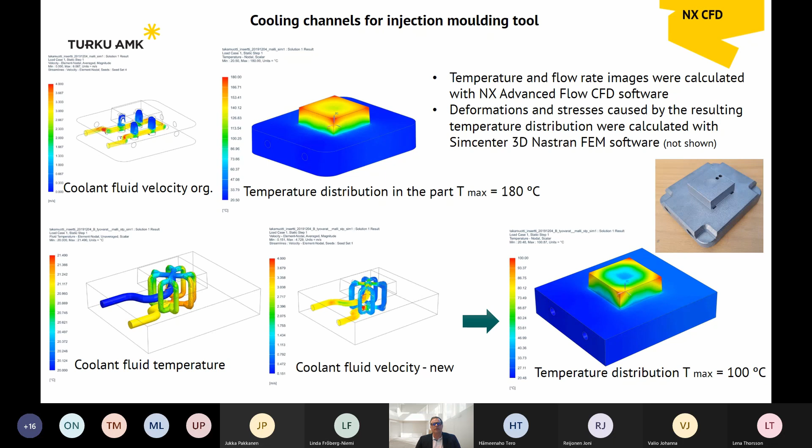Okay, then when we have something ready, we are interested to know how accurate the part is. For that, we have a new 3D scanning measuring system from ZEISS. We are able to achieve 0.04 millimeter accuracy, and for more precise pieces, there is a coordinate measuring machine available, and then we are at the level of 1 micron accuracy.

And when there is a need for mechanical properties testing, we have a tensile test machine and impact test machine. Also for hardness and specimen grinding, polishing equipment as well. We also have some microscopes, and surface roughness can be studied as well.

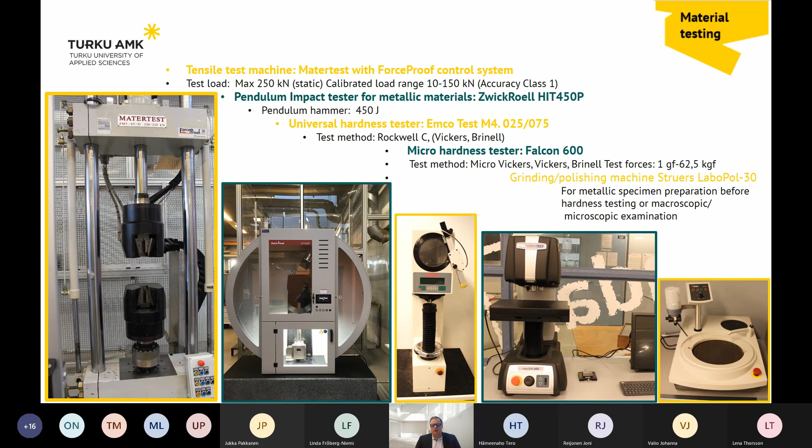So that's for the AM parts, and what other possibilities are there when we are thinking about a new assembly or a bigger structure? There might be other techniques also that should be used.

So we have sheet metal cutting, forming, bending machines, robots, and maybe more interesting is the laser welding and laser cladding possibilities. So we can even think about making some cladding to the AM produced part, maybe.

But all these are in a very small area, in the new campus area in Turku, Kupittaa area. So these are available.

And going deeper into laser welding, a new optics has arrived where we can use a 10 kilowatt multimode fiber laser. The spot size is 800 microns. Then we have another fiber laser with single mode, and there we are able to get the 50 micron spot size with fixed optics, and 120 microns with the scanner.

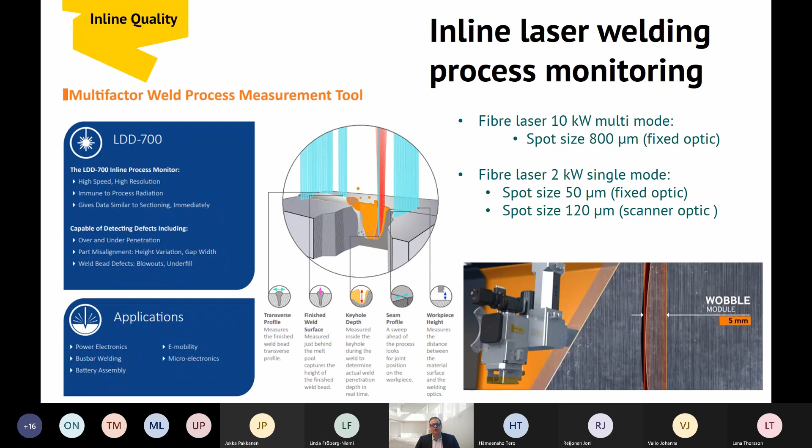So this is giving some possibilities to also weld AM produced parts. This is a field which has been studied lately, and naturally we are interested to do this more now with the new equipment, and when there are cases, please contact us.

So when we are thinking more about EVs, we have capabilities also to make welding for the batteries, to join battery cells and build the modules, and finally we can think about building a whole battery pack.

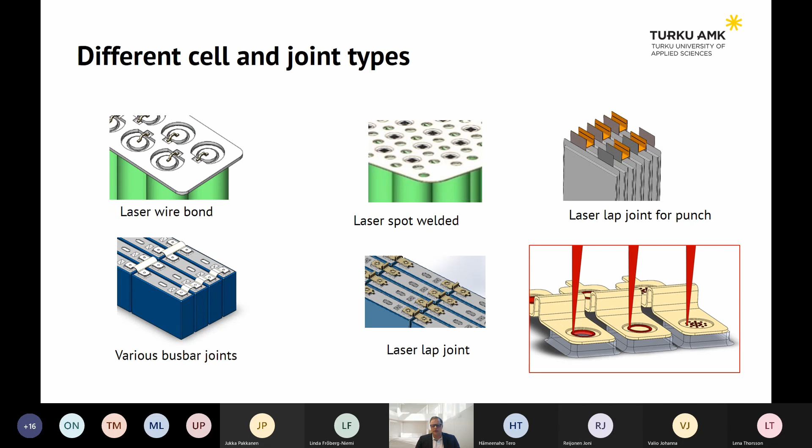At the moment we are already doing some smaller packs for our own research equipment. Also new dissimilar joints, for example copper aluminium.

It's a very typical situation with batteries, so not necessarily the 1000 nanometer wavelength is the best one. So new shorter wavelengths are coming, like green and blue wavelengths, about 400 to 500 nanometers, and these studies are currently being made also.

So this was a very short overview of what we have as facilities and equipment-wise at Turku, and naturally our aim is to implement this very much into our education and, as mentioned, into the research projects as well.